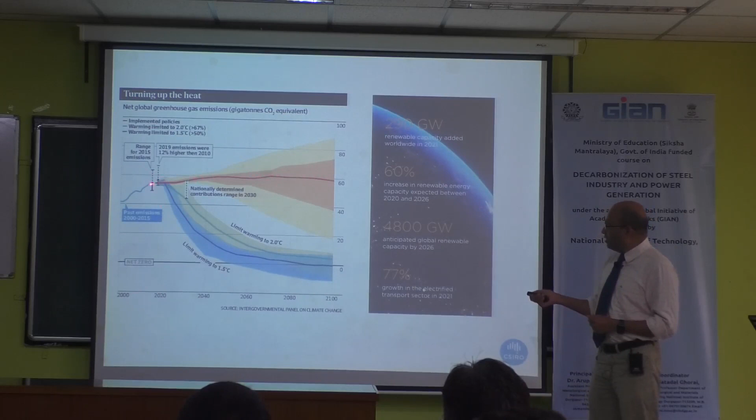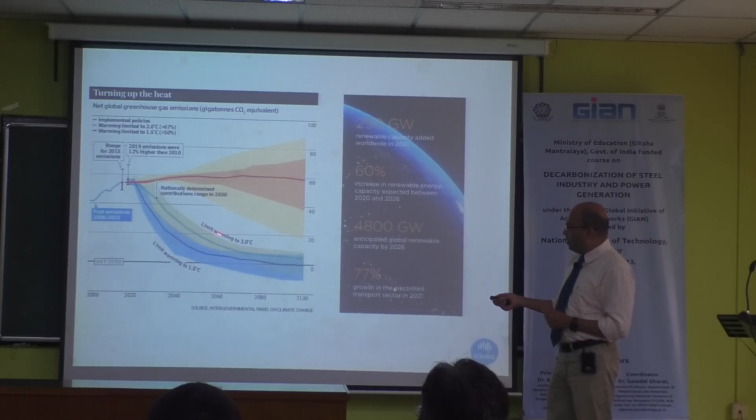If you implement policies and nationally determined contributions, every country has to produce this much, then you need to follow this kind of path to net zero. Some countries will hit net zero at 70, some at 80, some at 50, etc. But globally, if you follow that protocol and limit warming below 2 degrees, or below 1.5 degrees, substantial reduction is required. That's why huge renewable capacity is already being built - it's anticipated that by 2026, 4.8 terawatts of renewables will be in global capacity.

Even so, if you electrify everything, that's the hydrogen and decarbonization story. We know there aren't many options - one option is CCS, and one option is probably renewables and hydrogen.

If you look at CCS - can you go back? So you're saying that for limiting to 1.5 degrees centigrade, we have to make greenhouse emissions zero by 2100, something like that.

That's ambitious. Well, that's the thing - cost and climate change, which one do you want? Which one both? Or maybe even if you can limit somewhere, whatever trajectory you take, hopefully that will have a good outcome. But if you do nothing, it will go like that - this is not the option. At least the global consensus is that it's not the option.

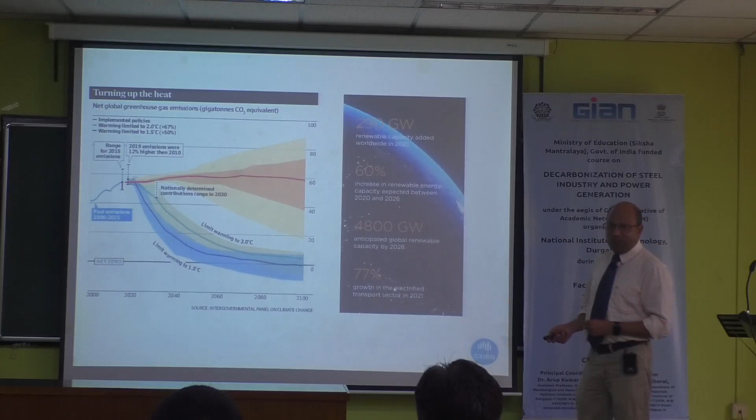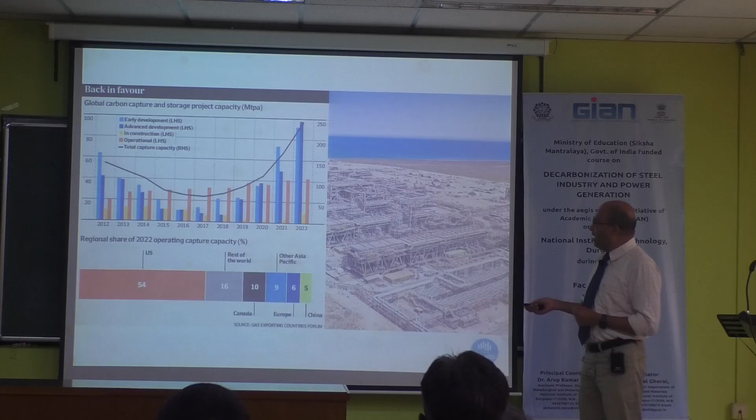Now let's move into the hydrogen story. We discussed this quite a bit, but let's go into the deeper end of it.

Primary resources, renewable energy - hydrogen is not an energy itself, it's an energy carrier. So we convert energy: you've got fossil energy, you've got other surplus energy, and then through electrolysis or other conversion processes, you can liquefy it and load it on a ship like LNG. So LNG, you can set up for liquid hydrogen gas maybe, something like that. Then in liquid form you can transport it by other means, and we'll look at some scenarios of what situation and what transport option should be used for hydrogen.

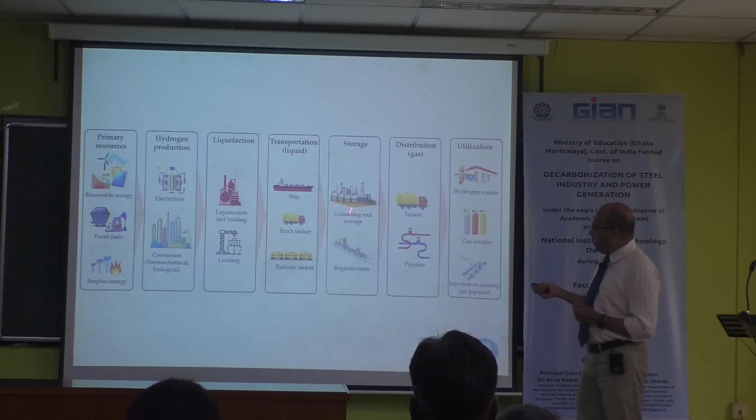Loading, unloading, and also regasification - you can put it in a tanker, pipeline, hydrogen station, refueling station, etc. That's the way, if you look at the broad structure.

Now at an even smaller scale, you can have an electric grid with supply, where solar can feed in, or wind, or other renewables - not only solar and wind. Then you can put in an electrolyzer, and the electrolyzer produces hydrogen and compresses it. You can transport it in a tube trailer, or then you can store it.

You can put it in a refilling station, and as I said, that's 8 kilogram hydrogen per 100 kilometre for a bus, for example, this kind of configuration. You can have this as another interesting system.

Some say it's costly, it's expensive. But what if we integrate with other industries? I don't know how they developed the sewerage system, the wastewater treatment system, not only for cities but also for industries. Wastewater treatment uses a lot of oxygen, so you can have oxygen generated, as I said, 8 times hydrogen. You can have your wastewater treatment plant, and then you can have it treated. If you combine 2-3 industries, this becomes a bit clumsy, but as long as you can supply the gas in the system, overall you're making more efficient, more beneficial utilization of the energy. So that can be another configuration.

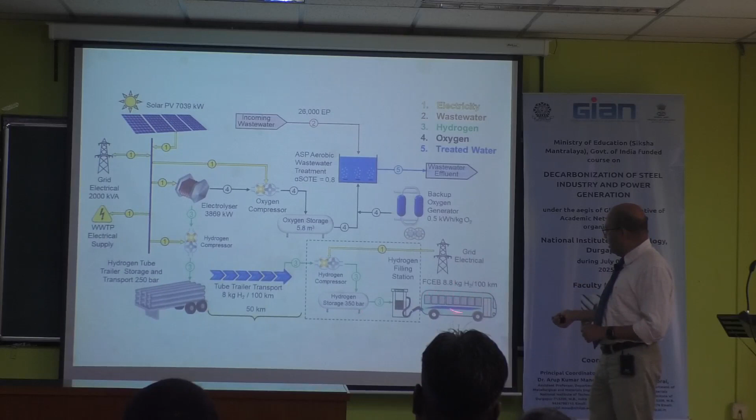Which one? Fuel cell electric vehicle. This one? Fuel cell electric bus. So, fuel cell electric bus. That's right. Basically, on the top there is maybe a 60 kilogram cylinder of hydrogen at 300 bar pressure, and here there is a fuel cell that supplies the fuel cell power, and then the bus.

The bus uses 8.8 kg hydrogen for 100 kilometers, something like that. But I think that has been more efficient - you get less hydrogen, 7 kilogram per plane, something like that. This is one of my papers, with one of my students, Dr. Arash Aghakhani, who did that one.

So that's high demand and long distance, and it is the longest distance, highest demand. We did some analysis, but that's behind the analysis - there are a lot of numbers, but broadly this is the scheme of the results.

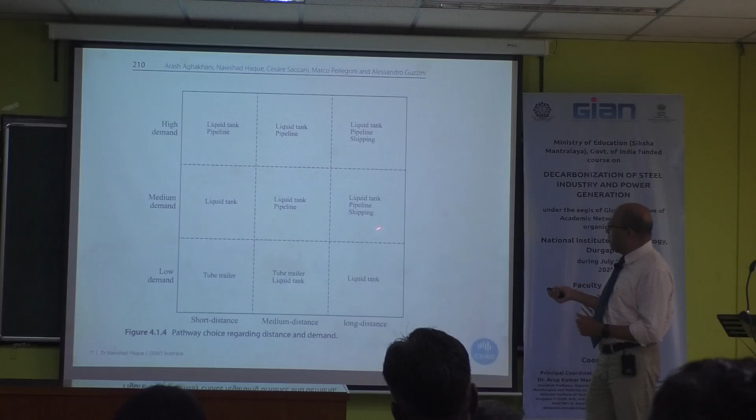If you see high demand and short distance, you should think about liquid tank, pipeline, tank, tube trailer. If, on the other hand, you have long distance but high demand, then pipeline, shipping, intercontinental transport - that sort of configuration you can have. So this is more on the transport evaluation of hydrogen.

As we said, you get electrolysis - that's what we're talking about. You can also gasify fossil energy like coal, particularly coal, and then steam - this is a common current method. You can say 70, 80, even 90% of hydrogen is probably made by that. Coal hydrogen is only Chinese, as far as I know, not others. Most places use steam methane reforming.

For example, fertilizer plants, urea plants, wherever hydrogen is needed, even oil refineries use substantial amounts of hydrogen, and that's mainly steam methane reforming. You produce hydrogen, put it in similar scenarios, store it, and then transport it and utilize it in various energy situations.

And apparently, if you have fossil hydrogen, you must capture the CO2, then it becomes blue hydrogen. If it is electrolysis green hydrogen, maybe there will be a mixture, but ultimately the CO2 footprint of this product should be low.

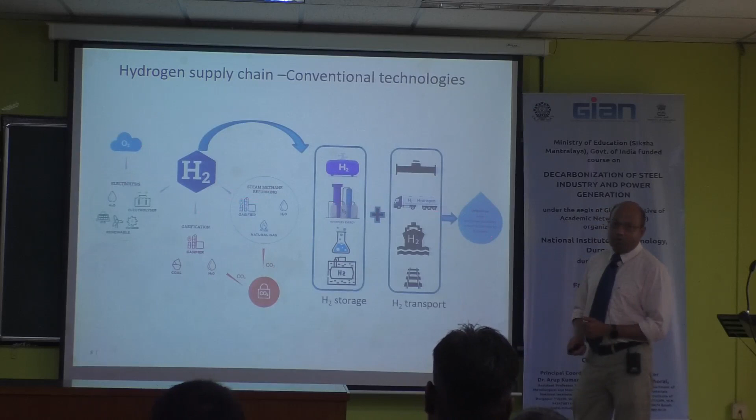Again, some new technologies - gasification, pyrolysis, even biochar, or fossil coal, carbon black. Because of methane pyrolysis, you can get carbon black also. That's another product - in Australia, one company called Hazer process basically produces solid carbon black, or carbon product, or even graphite. It's a very expensive material, as you know, graphite, because of the battery industry development and demand.

So these are the various ways people are thinking about it, because you want to reduce the cost of hydrogen. So what if you make hydrogen from natural gas, you can get some solid product, and that will reduce the cost. But at the end of the day, you can also capture some CO2, in the sense that the carbon is attached to the solid material. So all sorts of configurations are being looked at to reduce cost and reduce CO2 emission.

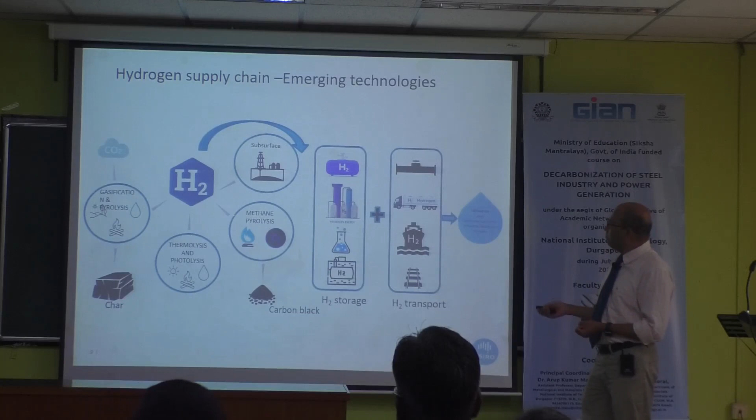If you look at the reforming process - steam reforming, partial oxidation, or autothermal reforming - your feedstock could be hydrocarbons, essentially fossil. Operating conditions are mostly high temperature. Many of these are commercial, used in various other technologies and industries. So it's not much new, really.

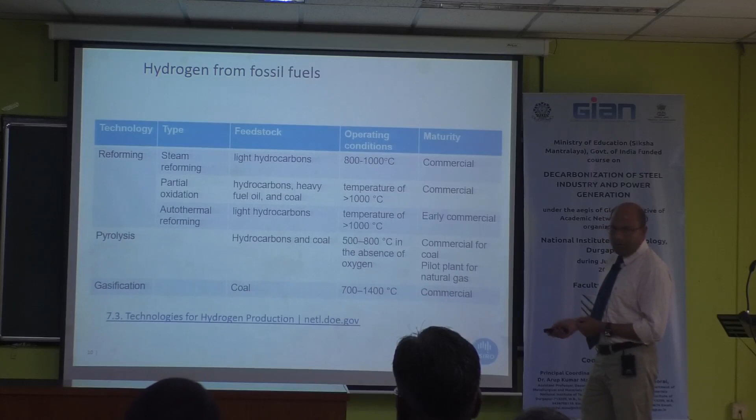But pyrolysis - sometimes some pilot plants are operating. Coal gasification is well established, commercial - there are hundreds of plants operating, particularly in China. You can also use biomass. Biomass is the same thing, but again, cost and biomass availability ultimately mean you need the feed material.

Biomass gasifier, still not a lot of these plants around. My major interest is green hydrogen, which is electrolysis - alkaline water electrolysis, PEM technology. So maybe we will spend some time on PEM technology today, and also SOE, solid oxide electrolyzer, and anion exchange membrane. Basically two inputs: water and electricity.

It's nothing else you really need. Most of this PEM technology is really room temperature kind of condition. At the end of the day, some of them - alkaline electrolyzer - there are large megawatt scale systems; Chinese are heavily promoting alkaline electrolyzer, I can see. PEM commercial, you can get some license through ITM.

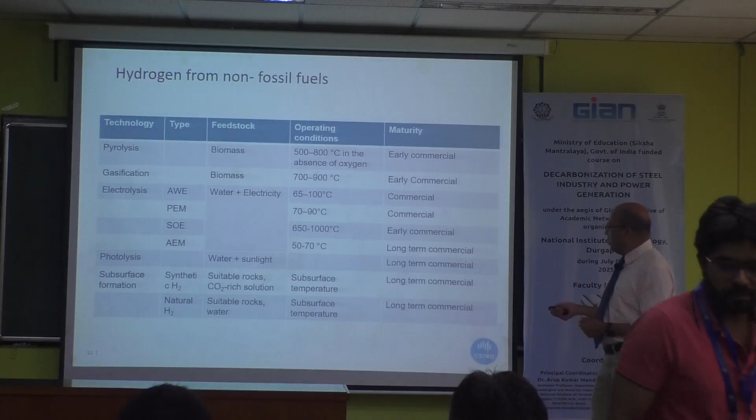Hydrogenics is a company that used to use PEM technology also. Siemens had got now maybe 10 megawatt, 50 megawatt - it was never heard of before, because probably it was below 1 megawatt scale. Now we are talking about 50 megawatt operational. Still, people are trying and learning. I wouldn't say that's fully commercial, but the other one is prototype.

For example, solar panels where at the same time you produce hydrogen - so you don't need another separate equipment. It's a kind of integrated system. Then there's natural hydrogen, which I will probably talk about.

PEM hydrogen, how does it work? How is it extracted? I will go into that in a couple of slides later - I'll go deeper into the proton exchange membrane technology.

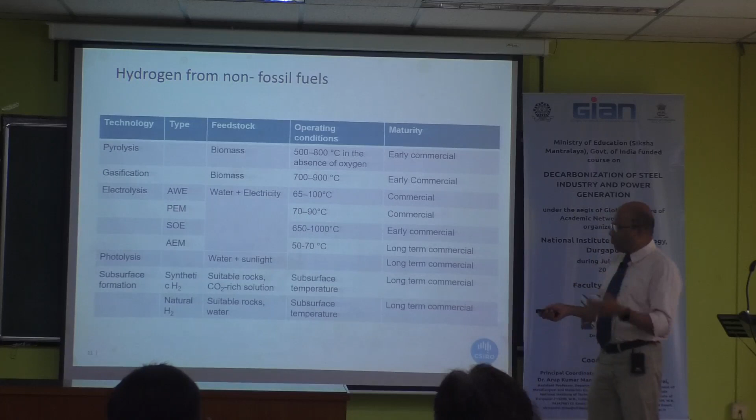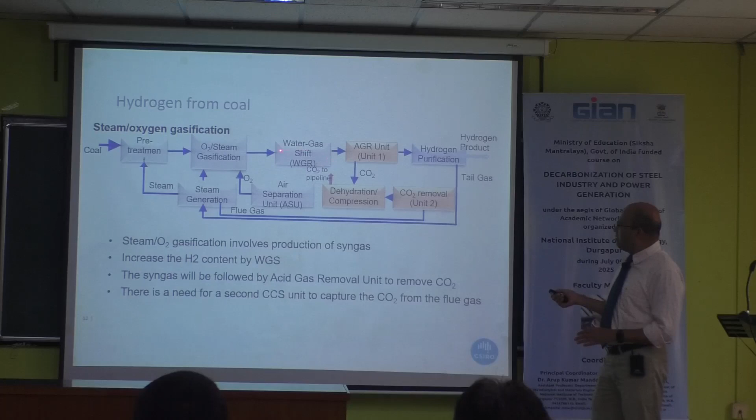And obviously CCS is required in some cases to make it completely free of CO2. What is water gas shift, WGS? That's kind of steam reaction - it makes CO2 plus hydrogen essentially. That's the classical reaction.

What is AGR? Acid gas removal - that's kind of gas treatment. You have to do some treatment for the gas.

Hydrogen from natural gas, which currently accounts for 50% of hydrogen production, is from natural gas via steam methane reforming, being the most prevalent production technology, with emission intensity depending on situation of 7.5 to 12 tons of CO2 per ton of hydrogen produced.

That 12 ton figure is generally the benchmark people look at, and anything you reduce against that is the target. I don't know if 7.5 is possible if you run that plant from renewable electricity potential. But natural gas is the major thing - most of the world's urea plants, like in Allahabad, fertilizer plants, ammonia plants, any methanol plant you go to, that's the common technology.

The emission intensity can be significantly reduced above 90% through integration with CCS, depending on technologies. But CCS also has a lot of challenges. Due to large reserves of fossil fuels in some countries and well established technologies, some countries are favoring hydrocarbons, so you need to have CCS to reduce what we call blue hydrogen.

What is CCS? Carbon capture and storage - we discussed that some parts of the world are implementing this technology, where you capture CO2, enrich it, and store it somewhere underground. Now utilization is slowly coming into play, so you can utilize parts of that too.

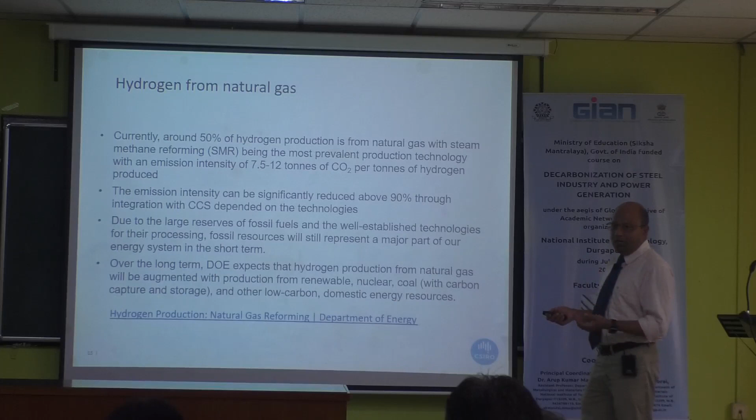I'll go into a little bit more detail on that, steam methane reforming. So it's natural gas and steam fed together, split feed for reforming, and then generally there are 2-3 reformers - primary and secondary reformer. Then again water gas shift reaction, acid gas removal unit, and you purify the gas to get pure hydrogen essentially. So the process for syngas production starts with pre-reforming and reforming.

The autothermal reforming is also a process in which the reforming thermal energy is produced from burning natural gas.

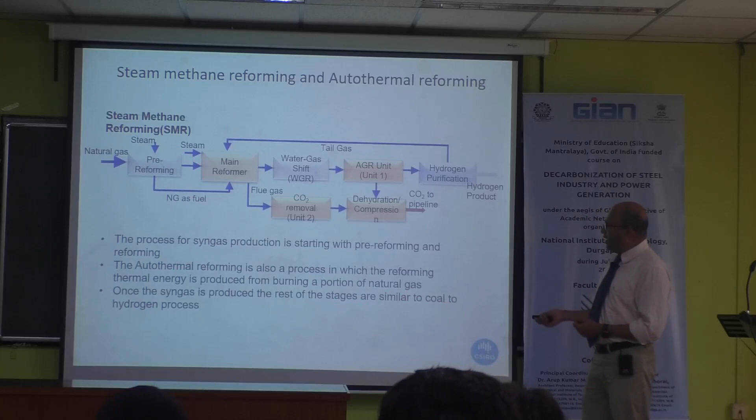This is a kind of new, interesting process some countries are working on. Actually, Australian companies are raising funds to build bigger plants using natural gas, which you pyrolyze and purify to get hydrogen gas. Obviously there is no CO2, but some carbon can be made into a carbon product like hard carbon or graphite. I think this company is trying to produce graphite because there is huge demand for it in the world.

So methane pyrolysis is a process in which thermal energy is applied to methane gas to break it, because methane has got 4 units or molecules of hydrogen. Breaking the chemical bond between carbon and hydrogen requires a lot of heat, generating hydrogen gas and a solid carbon product with no CO2 emission.

So there is a unique advantage of methane pyrolysis over conventional steam reforming and coal gasification. Depending on the characteristics and price of the carbon product, its sale may improve the economics of the industrial methane pyrolysis process. If you have pure graphite or some premium carbon product, it can attract a lot of revenue, which can subsequently reduce the hydrogen cost - so it's a kind of multi-product process.

If we talk about biomass, ultimately biomass is carbon and hydrogen - we call it carbohydrate. Biomass pyrolysis involves rapid heating of biomass, often lignocellulosic-based particles, absent of air, at approximately 500 to 700 degrees Celsius. There are various ways - low temperature and high temperature pyrolysis. This results in the production of gas, vapors including water, and solids including mineral matter and char, similar to the charcoal production scenario I showed you.

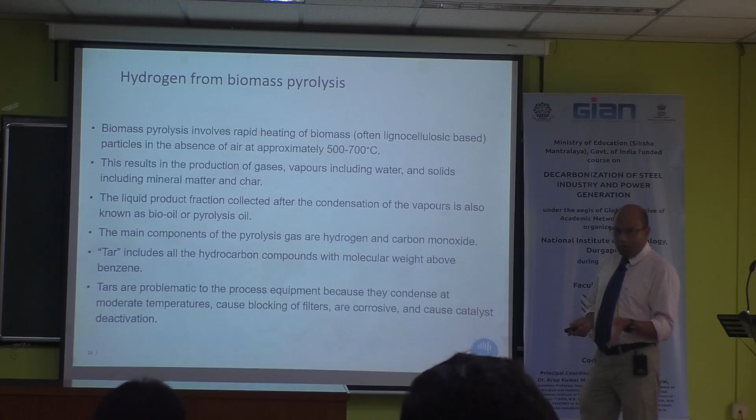But again, it's about the treatment of biomass - that's another story, and how much biomass you have around, how much you can produce, depends on the country, the land, etc. In Australia, we have a lot of waste biomass - I think many countries have that. But because we have a strong wood and forest-based industry, they produce a lot of waste that could potentially be utilized. So that's biomass pyrolysis, but biomass can also be gasified at high temperature.

The good thing is that gasification can take quite a variety of biomass. You get syngas, and there are a number of ways to use it - this syngas is quite a flexible chemical precursor. From biomass gasification you can produce methanol, ethanol, diesel, even Fischer-Tropsch liquids, which can move into diesel fuel or even aviation fuel for planes. You can also produce ammonia, synthetic natural gas, etc.

There are some advanced-scale projects in terms of TRL in North America, and particularly in Europe. But despite the development of the concept, it hasn't been commercialized for hydrogen production, because the hydrogen amount is limited, and if you want to apply hydrogen in a fuel cell, there's a standard now requiring it to be very, very pure. This process may not be able to produce that kind of fuel-cell-grade hydrogen, but it may be possible for blending into the natural gas pipeline.

So it depends on where you want to use it. Sir, if you would compare biomass with your municipal solid waste, you have hydrogen versus carbon ratio, and based on which you assess whether this project is feasible or not.

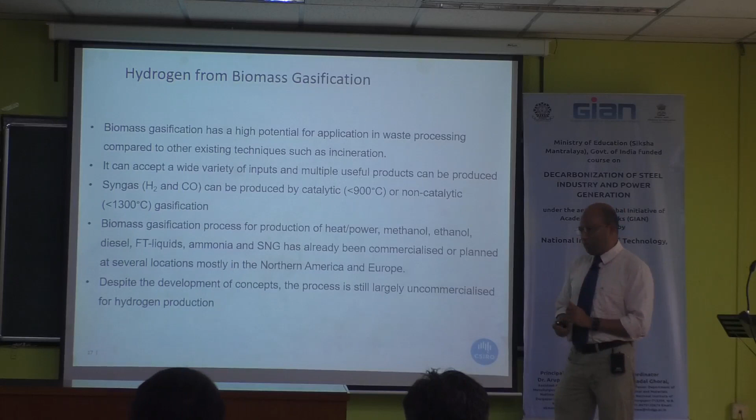So I think there are, as I said, that air, steam, oxygen mixture that sort of presents when you use biomass to hydrogen product. But essentially the technology is very similar, though some people tweak it with several other catalysts or mix. Ultimately, that's the same technology.

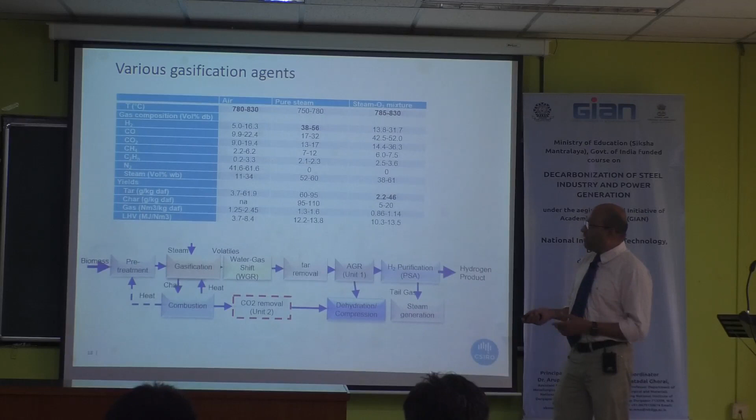So this is kind of my favorite area, and I think this is the area it should be, because ultimately we are doing so many things and it's hard to build the thermodynamic side. So you put lots of energy and do lots of things, and finally you get a product, and what's the cost, what's so much activity.

With this one, I think it's neat in a sense because if you can get enough electricity, that's the key point. If you get enough electricity and that comes from renewables, then it doesn't matter how much you use. So generally in 2020 and 2050 targets, you can say three electrolyzers we're talking about here.

Does that answer the question kind of? We'll go into more detail of each of the individual technologies. I can show you the cell level, stack level, and the system level probably in one of the slides. Can you explain the difference between all three technologies?

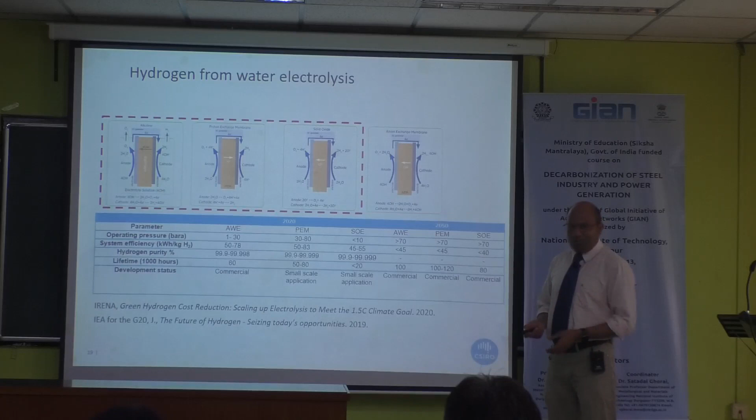I'm not sure if any Indian company is producing electrolyzers - anyone have around? No, not yet. So because of that, if they see a business opportunity, you will see everyone get into it, like mini cars and so on. But I heard that Reliance is thinking of potentially producing electrolyzers. I'm sure battery companies are considering it too - it's a new product, so obviously people will be coming in slowly. So that's it, a little bit about alkaline.

So both need deionized water. This has got, as I said, potassium hydroxide, so you get water, the alkali kind of moves around, and then you get hydrogen separation. You can have oxygen as a byproduct, and you gas cool them and you get hydrogen.

With PEM, you get deionized water, which goes to the water storage, and that's a PEM stack. You pass water through small channels, and then you apply electricity, which breaks it into hydrogen and oxygen. The hydrogen goes through the membrane to separate out. It's a very simple process in this sense.

You get heat, and because some water will be taken with it, you need to add that back to the water, and then you get pure hydrogen. This sort of system is very responsive to renewable intermittency and also produces very high quality hydrogen, even at pressure.

Ultimately, electricity will be fed to both places, and they are very similar in terms of electronics. Cost-wise very similar, but here because you are handling a lot of alkali, there's a corrosion issue, and here not such thing.

Oxygen purity, that's a good question. It's not sufficient for medical oxygen, maybe for industrial application. For medical oxygen, we need to develop and produce another step to get it. Maybe you can make some tricks here - that's what we have done, our IP, so it can generate hydrogen but also medical grade oxygen.

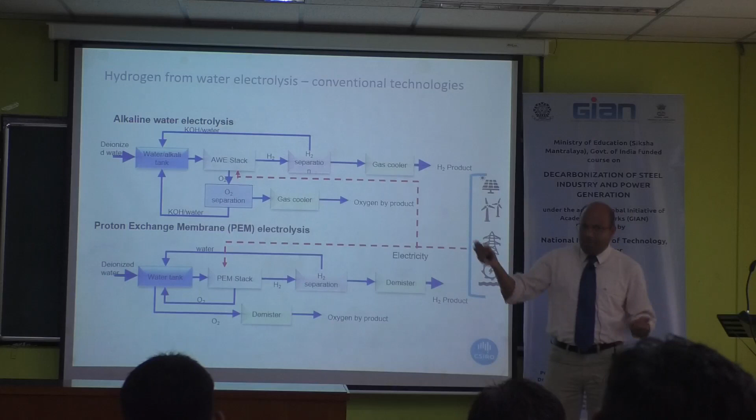For transportation, what kind of pressure is required to move hydrogen? What pressure is required to transport it? At least I would say 200 bar, or liquefied which is even lower, or in a gaseous form. Even say 700 to 800 bar pressure in the car, because the car has to be at that pressure. When you inject it in, it will reduce a bit of pressure. At 700 bar it's still gas, very compressed gas. If you go a little bit up, maybe it will be liquefied - so near liquefied, but not liquid yet.

The solid oxide electrolyzer operates at high temperature, but we need that heat somehow. It enables favorable kinetics that allow use of relatively cheap electrodes - that's another advantage. We'll go into the materials area a little later. Electricity demand decreases and part of the energy for separation is provided through heat, with potential for reversible operation.

This can be run as SOE, solid oxide electrolyzer, or as SOFC, solid oxide fuel cell. If you reverse it, it can give you power - the same unit, depending on how you operate it, can give you hydrogen, or if you pass hydrogen through it, it can give you power. How is it formulated? The catalyst changes at the anode and cathode, so if you change that, the same reaction happens. Solid oxide electrolyzer produces hydrogen, while the solid oxide fuel cell produces power - that's the difference.

And then this one I'm not too much familiar with, to be honest. That's what I call anion exchange membrane. Some countries, some companies I heard recently, are very active in this area. Apparently there are some advantages, but I'm not too familiar with that one.

In Australia there's another company called Hysata. They said they've made a big breakthrough, 95% efficient compared to any of these technologies. The government is supporting that one. But our understanding is it's still kind of fancy, small scale works probably, but what will happen at larger scale is yet to be seen.

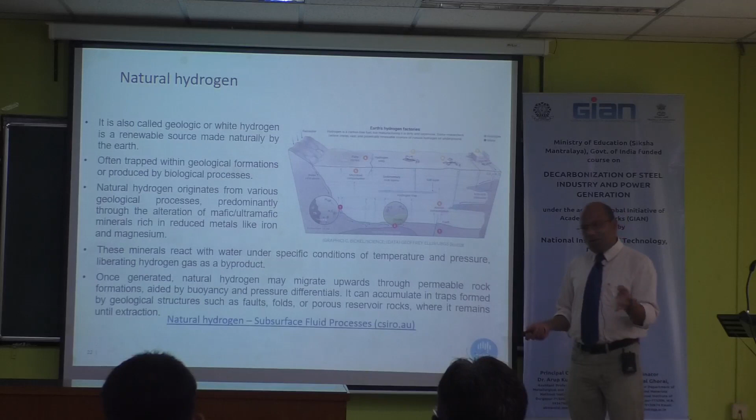So let's move into natural hydrogen, called geologic hydrogen - it's like a gas field. In some places underground, a very low amount of hydrogen is present along with gas. My team and I have looked at this with some geologist colleagues; a lot of people are working on this, it's a very hot area. Many oil and gas companies are interested because if hydrogen comes in, they can leverage what they've already explored.

So the scenario is: you have oil there, you take it and process it, running the process plant maybe with renewables or something. That gives you relatively low CO2 hydrogen at relatively low cost, but obviously you need to purify and process it.

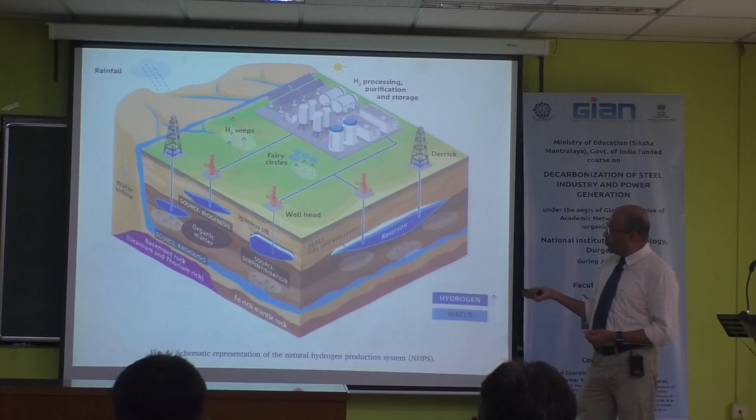There are a couple of projects I know in Australia, at least two companies. One is called Gold Hydrogen - natural hydrogen is called gold hydrogen, that's another color. They've raised some money and are quite serious, based in South Australia. We did a techno-economic analysis for them, and one of my team members, Dr. Mohammed, and other colleagues developed a model for that hydrogen process - something going in, out, and ultimately getting compressed gas.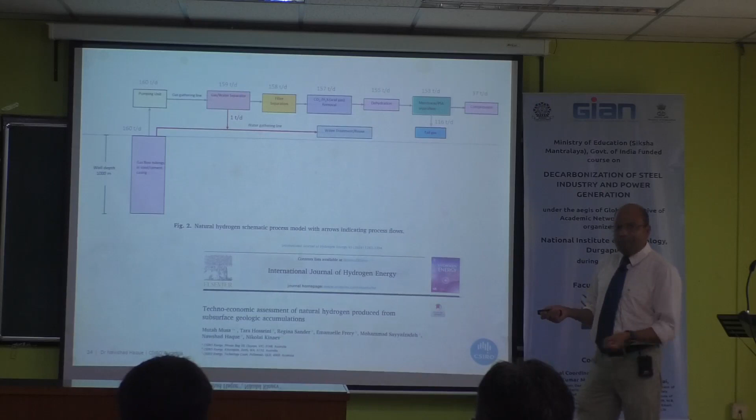Most of these hydrogen gas fields have helium too, so you can have a byproduct. There's good demand for helium in the world - so which country has got it?

According to our assessment, production cost is about $2.97 per kilogram - that was the base case scenario. But it depends on the hydrogen concentration: if concentration is high, it can be very cheap; if low, it can be quite expensive. Same with flow rate, because in gas flow you cannot control it - high flow rate, low flow rate means high capex or low capex, since it's a natural material you cannot control. Discount rate and tax rate can also vary, giving a sensitivity scenario for the levelized cost of hydrogen.

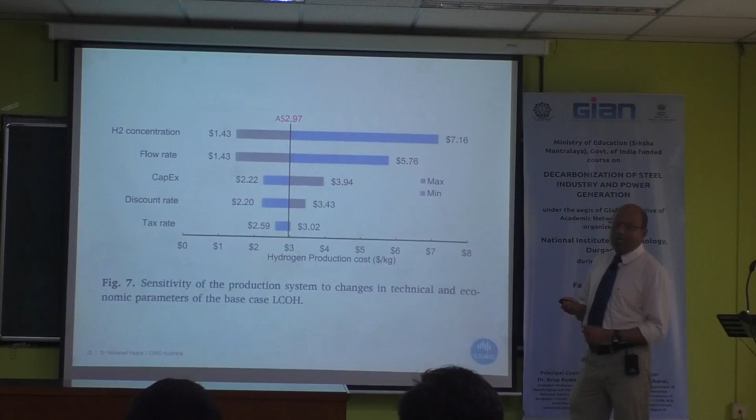That's natural material, and the good thing is this is probably the first reported techno-economic study on this kind of hydrogen in the whole world. Similarly, we did LCOH for gold hydrogen - I don't think anybody else has looked at that.

Now with PEM - that's our PEM technology. We worked nearly 2 years on hydrogen, plus about 20 years of work toward developing the PEM electrolyzer technology. That PEM electrolyzer was given to a company called Endua, and Endua now has a kind of box, this kind of system - they call it the Endua power bank. It's a long duration energy storage product, self-contained, easily deployable, relocatable, on-site hydrogen generation and storage.

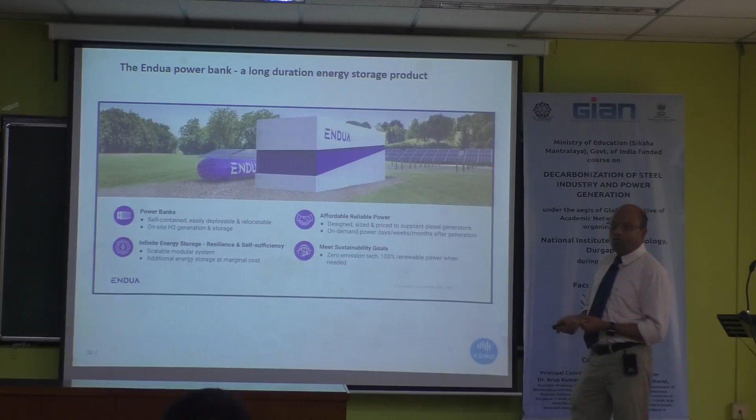It offers infinite energy storage because you have a 24/7 situation, and it's scalable and modular, providing additional energy storage at marginal cost. Relatively cheap, they think, but you have to contract them because they're not selling the product directly. The IP is essentially ours, and we give them R&D support. It's a zero emission technology, 100% renewable power when you get it - so if you have renewable power, those people are considering it seriously. I'd recommend communicating with this company; there's a website I can point you to later.

Our technology - we have a good chapter on these kinds of technologies. At the system level, if you go from high level, as we already talked about, you have the electrolyzer, water, oxygen coming up, hydrogen, and then you compress it and it goes to storage.

At the stack level, you have one cell, another cell - it's like a battery. Those are the materials: they call it the porous transport layer, PTL. Then there's the coated material bipolar plate, and iridium as the anode material, platinum as the cathode material - sometimes platinum palladium can also be used. So that's the cathode, anode, membrane, porous transport layer, and the bipolar plate.

That's kind of a cell, that's one cell. You have another cell, depending on modular design. This may be the smallest unit. If you have 10 megawatts, you may have maybe hundreds of cells together.

Maybe a few cells make a stack, 10 cells make a stack, then maybe 10 stacks make a kind of system. And that system is not the only thing - you also need balance of plant, water purification system, water pumping, hydrogen separation, hydrogen storage, compression.

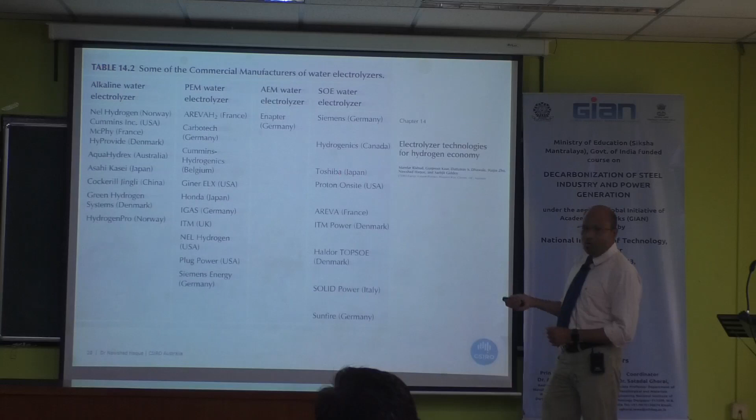Japanese, Koreans also - Koreans. I wish some of the Indian companies will be coming into the play - Reliance Power, maybe, as you said, or others may have a product here.

Make in India programs - the challenge is not capital, it's materials, which are raw material related. So that's a more detailed electrolyzer comparison - what's the electrolyte material, what's the separator - that's what we need to spec.

For example, if you go to solid oxide electrolyzer, it's YSZ, Yttria stabilized zirconia. Zirconia is very difficult to get, a very expensive product. India has a lot of mineral sands, and potentially zircon can be sourced. Yttria is a rare earth special product - not rare earth exactly, but a critical mineral. That's why yesterday I mentioned about it.

The challenge is, some people say cost - I don't think cost is the real challenge, it will come down because a lot of people are working on it. The challenge is the amount of material required for this specialty material. For example, lanthanum, strontium, cobalt - and LSM, lanthanum strontium manganite or some similar metal product. These are the special kind of materials needed, along with YSZ. So with the solid oxide electrolyzer, the problem is the material, and same with PEM.

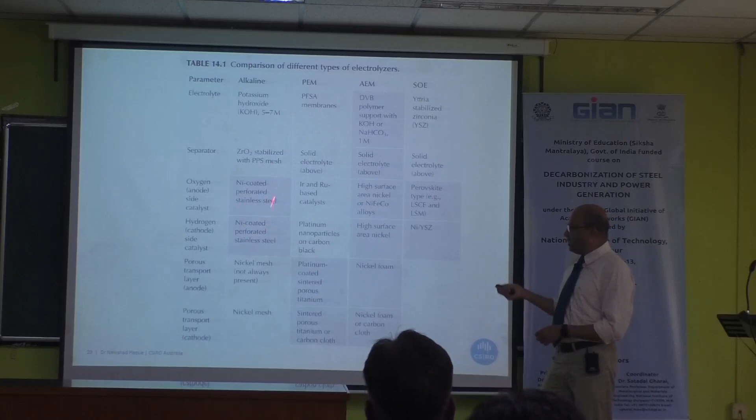But here there's a lot of KOH - we didn't even cover KOH. That's another thing, and also the operation - each technology has its own pros and cons. I believe one of these technologies will win, I don't know which will really be the winner. We are betting on PEM and also SOE, but maybe other technology will come. Time will tell.

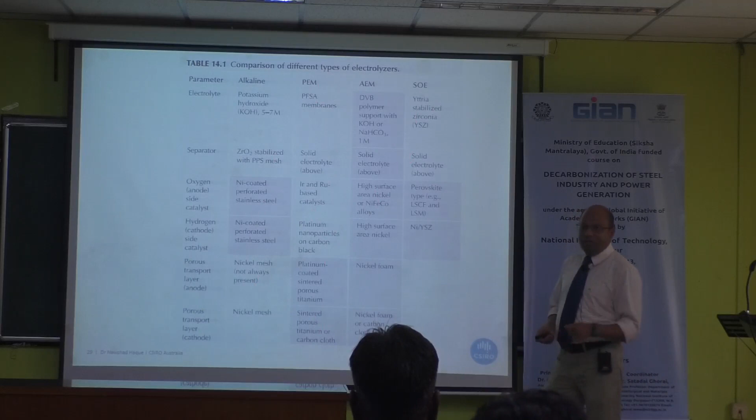Again, the bipolar plate and the frames each use their own materials. Generally, if you talk about the balance of plant, it's mainly titanium, stainless steel - even non-steel is used overall - and nickel coated stainless steel, things like that.

As this technology takes off, it will require a lot of material. One of our students, a postdoc, Dr. Shalini Dharma from NIT Allahabad - I gave her a project where we're looking at, for India's whole unit capacity, how much steel, aluminum, and other materials are required. It's enormous - a huge amount of material required.

So can we divert from currently producing 100 million tons of steel toward renewable energy transition, or targeting say 300 million tons by 2030? How much of that material can you allocate for energy transition? That's another question, and we've already published on this - you can Google how much steel, aluminum, and copper type material is required for India's transition and for realizing wind energy. We're also now looking at how much rare earth is required and where that will come from - that's another question to answer.

So again, there's a table from our chapter showing 2020 and 2050 targets - I showed you the DOE target before - for alkaline electrolyzer, PEM electrolyzer, AEM (anion exchange membrane), and SOE electrolyzer. You can see operating temperature, operating pressure, current density, voltage efficiency, specific electrical energy requirements, and system efficiency.

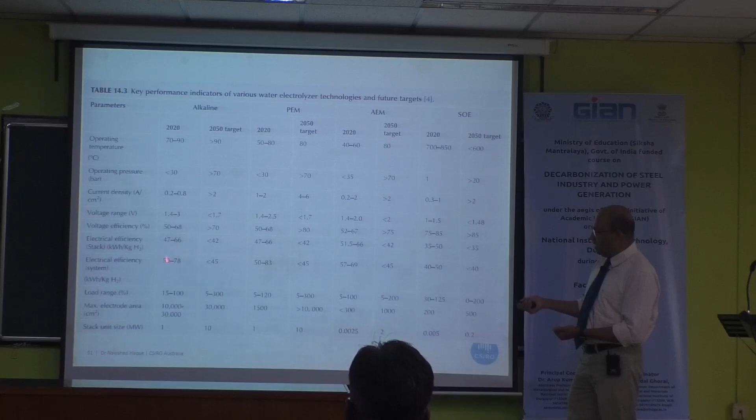Electrical efficiency at stack level and system level - you can see that when you go from stack to system, you need more electricity. Then load range, maximum electrode area, stack and unit size - you can see SOE is still small scale, whereas PEM systems are maybe at 10 megawatts already.

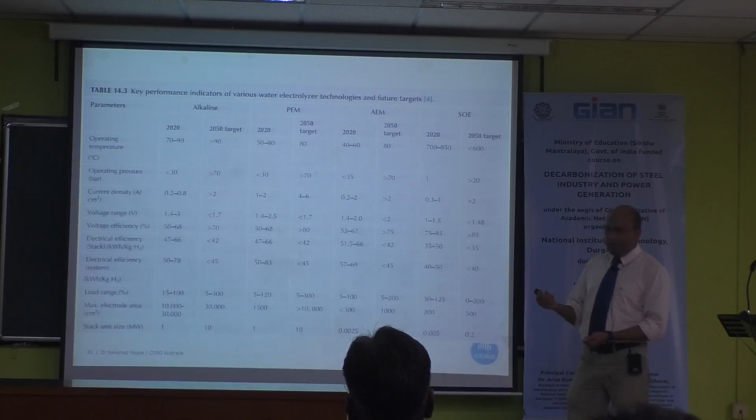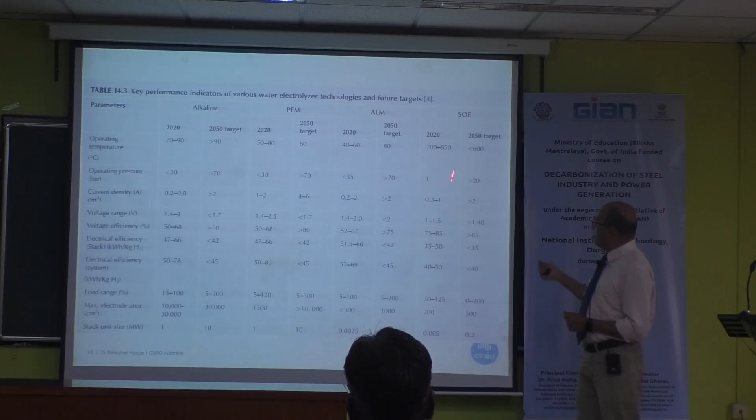Each technology has many people working on various approaches - different countries have their different focus, and the Chinese are focusing on alkaline, though they also do PEM, not exclusively one or the other. I think we believe PEM and SOE will be the key technologies.

And also hydrogen purity, how fast it can respond. As you can see, PEM is less than 5 minutes, whereas others are higher compared to PEM.

Stack capital cost - somebody asked about the capital cost, so that looks like it's a little bit less than target. If now they're saying 400, I doubt that is probably most cases, as you said, it's a bit more. But I think that's the highest cost, and also lifetime - it looks like they have run, although the target is 10 years, but they are less.

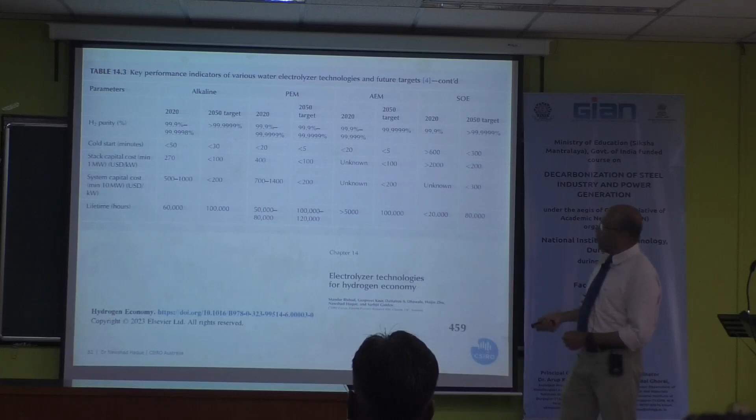So at the moment, maybe 6-7 years, that needs to be extended to 10, 12 plus maybe. SOE looks like, at the moment, less than 20, whereas that needs to be... any question about this, any technologies or confusion or anything like that?

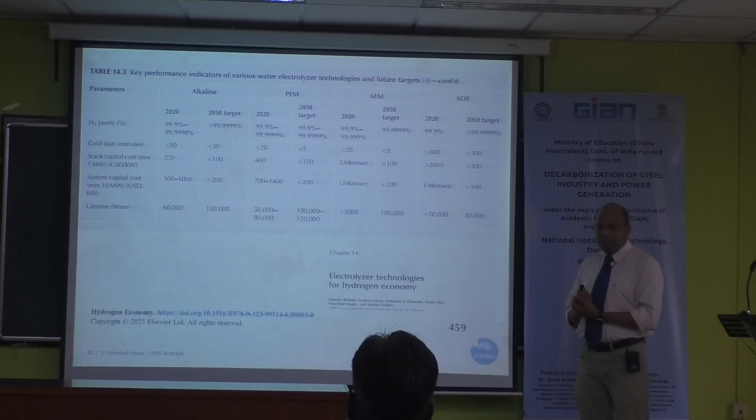Is it very clear? Okay. Just a question - if we start using hydrogen initially, like we have no use right now as of now, so if we start using hydrogen, what kind of technology initially at a very low cost can be utilized in a steel plant?

I think you should look at SOE. No, it's all right. Whatever technology may be for extracting hydrogen, but what kind of technology, in what...

Talking about hydrogen production? No, hydrogen use - use of hydrogen in the steel plant, what technology in hydrogen is there? That's matrix type, DRI type. Let me moderate - that is hydrogen use at scale.

Initially, stack injection of hydrogen gas. No, no - so what's the question? Can I explain? Can I answer? Please, go ahead, you got it. In steel plants, we all have electrolyzers, we all have hydrogen.

But coating of zinc, coating of aluminum, coating of magnesium on steel, tin plates - all steel manufacturing units having color coating lines or this kind of coatings, we have hydrogen. We have hydrogen plants installed. In JSW Engineers, we already have 2 hydrogen plants.

So what does Tata Steel use hydrogen for? What is the use of hydrogen? What do you do with it? Because we wanted to prevent the oxidation of the steel surface.

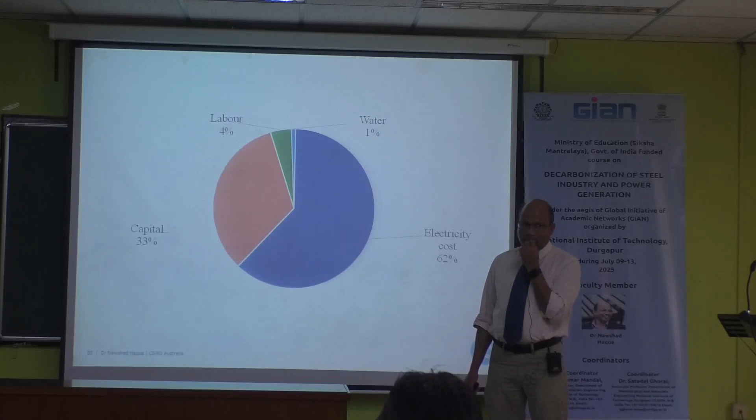So if you use argon - presently it's not there, it will come in the next plant. If you are using argon or any other inert gas, it's not going to be agreeable.

For example, you are making auto grade steel - automotive steel, that specialized steel. No, no.

In case of structurals and flat products, it's not required. In specialized products, we don't have that technology.

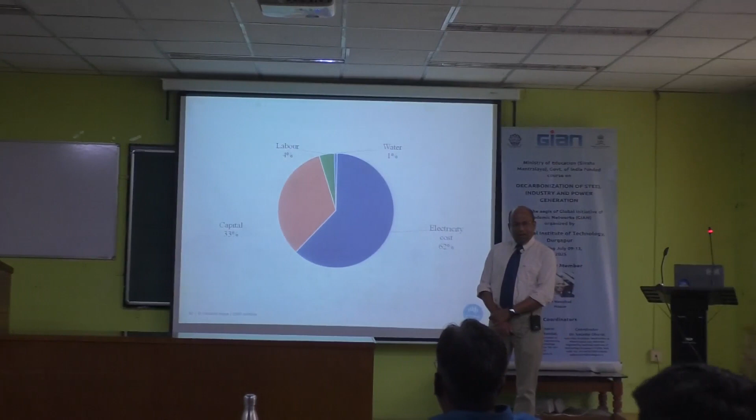Okay, at the moment in the steel plant, do you use hydrogen at all? No. Actually, no - the thing is that no. What he is saying is that it's plant specific. The answer is that it's plant specific.

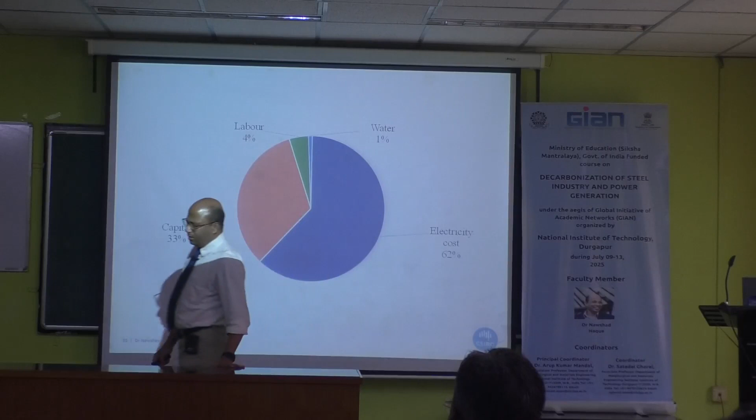We don't have the product of color coating. The thing is that we are talking about Durgapur steel plant - Durgapur steel plant and IISCO would not have that product. So that's why there is presently no use of hydrogen right now.

What about cooling? Some part of the cooling uses power plant hydrogen? Power plants use hydrogen - no, the blast furnaces in the steel sector are mostly nitrogen, water cooled. So you don't have hydrogen on site at the moment at all, huh?

Whereas power plants have hydrogen for cooling, right? Yeah, but we procure it from outside, from cylinders. So it's not much use - it's a small amount, very small, but it's still used. So that's in a closed loop.

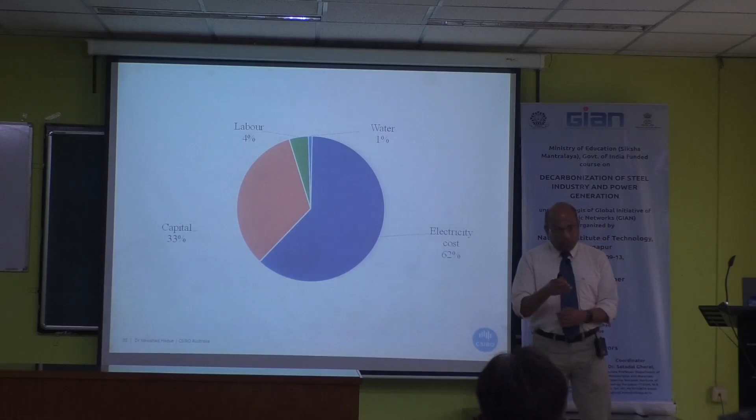So are you producing it? Use it in the steel plant or power plant? Power plant - so that's right, you are producing hydrogen. So on site you are producing it instead of using the cylinder - you don't take cylinders, you produce it yourself, at a small scale. What kind of technology do you use?

None of these would be in a blast furnace. A lot of them use water and air, then separate. It's a kind of oxygen plant, also uses hydrogen, can produce hydrogen. But anyway, there is an oxygen plant in the steel plant, right? What's the use for oxygen for all these BOS and other units?

Oxygen is mostly two uses: one is injection in blast furnace, and second is steel making. So if you have an electrolyzer plant, I think your objective is to get more oxygen rather than hydrogen, isn't it, at the moment? Because our oxygen requirement is very high. We have a 1500 ton per day plant.

So my feeling is that companies like you need to think about pilot plants, small ones, and try to learn, produce hydrogen and oxygen, and see what the option is.

So first, we need to identify the use of hydrogen. Then we need to identify where the production is, the area of usage of hydrogen. First, productive use - what is the use?

What's going on is, suppose you have a ladle repair area. Hydrogen instead of natural gas or LPG or whatever mixed gas is available for heating. Suppose you are using mixed gas in the plant - those mixed gases in blast furnace are in excess, we are flaring it out.

So why would someone invest in hydrogen then? So you have excess fuel with the plant. Yes, we are flaring it out. We are using it to our maximum capacity, then we are flaring out the rest.

So you don't need fuel, you need decarbonization. Yes, our target is decarbonization. So the objective - how you can manage that is a different proposition, isn't it?

So let me tell you the other applications - like reheating furnace with the HSM or any other sinter plant, pellet plant, regulating machines. They are going for oxy-hydrogen burners.

Oxy-fuel - it will include hydrogen use in that then, oxy-fuel. So many applications are coming. It sounds like in blast furnace they are using it.

It's coming, it's okay, but our question is that at the current plant, what is the hydrogen use? Whatever DRI you can do, but we don't have DRI. We don't have a DRI unit at SAIL right now.

But other steel makers seem to be establishing it in the next 5-10 years, new commissioning processes. Immediately there's no use.

But there are some DRI units already working, independent DRI units on a smaller scale. Another thing you can look at that way, is if you produce some hydrogen, what about the natural gas pipeline?

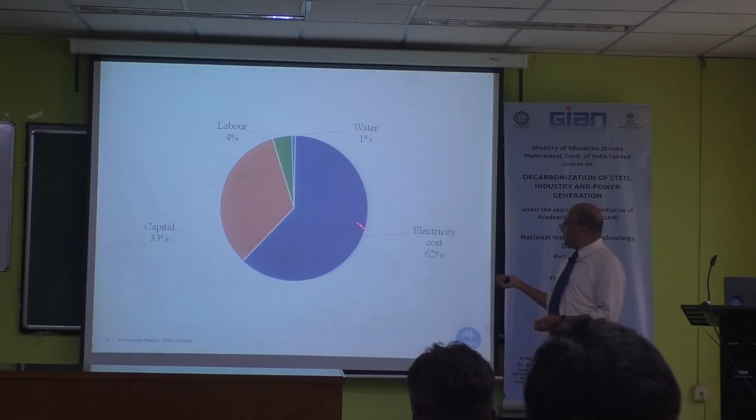So anyway, that PEM technology we evaluated looks like this: electricity is 62%, capital cost is 33%. Capital cost is a one-time cost, while electricity, labor and water are running costs.

Capital is here, but say you get a loan - so it's an interest cost, interest on capital, essentially that is for the electrolyzer. It's a requirement for the plant, for the plant as a whole.

If you borrow 100% of the money, that's it - whether you run it or not, you have to pay the interest, isn't it? So that's the money, but sometimes you have your own money.

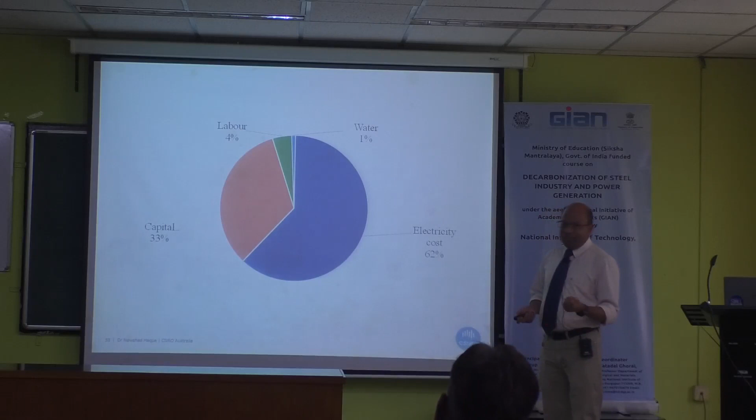And whatever the plan, so roughly it looks like two-thirds is the electricity. At least if you ignore capital cost, mostly the result is electricity.

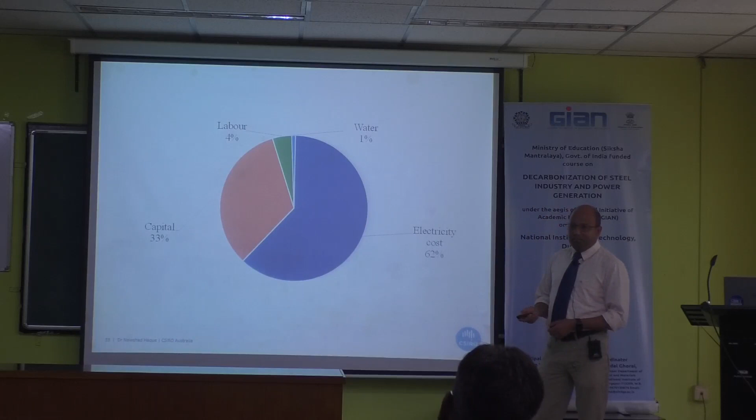So I think that fossil fuel based hydrogen production technology will have a significant role in the energy transition period, and that's what we see, maybe blue hydrogen. So gray to blue to green, that's the conversion we are thinking.

There are lots of potential for cost reduction of natural gas pyrolysis as the technology develops, through the opportunities for refining carbon as byproducts. A lot of people are seriously thinking about this because of graphite production. Suddenly there is not much graphite around the world, and prices are going through the roof. That's really because the EV market is taking off, and that requires graphite for batteries, and there is not much, so many companies are investing in that area.

And then biomass-based technology also remains a priority where biomass resources are available, and this technology could benefit from carbon capture and storage to become a carbon neutral process.

Natural hydrogen is also another emerging technology that has significant potential, and new exploration in various parts of the world is underway. Whether India has got natural hydrogen, we don't know, right? We have got gas, right? Gas field, offshore gas maybe. So if the offshore gas is there, which is CH4, potentially there is somewhere H2. So if that is the case, then people will be extracting H2 rather than CH4.

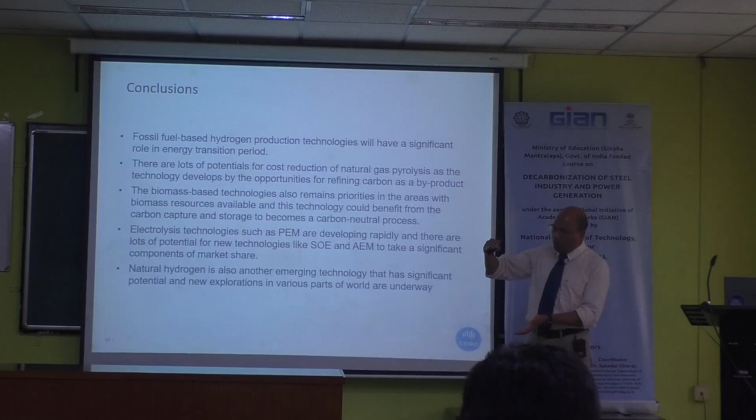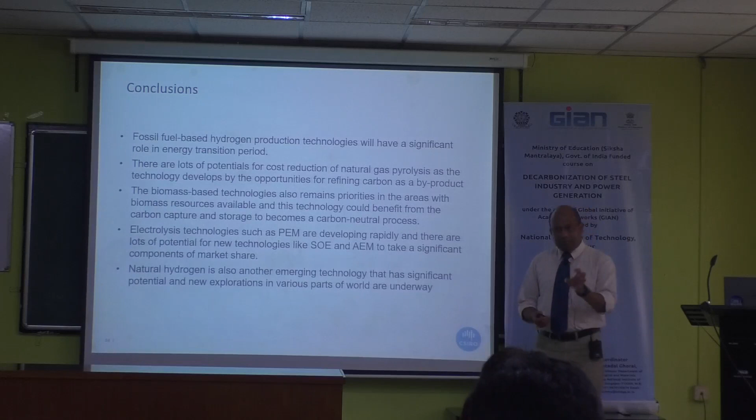This can also happen in a power plant where CO2 emission is there. You can capture the power plant gas, the CO2, but there is no hydrogen there. So you are talking about power plant gas and carbon capture. You can capture carbon, CO2, then enrich and store it, but you want to utilize it. Is it just making graphite? This is natural gas to graphite, but I'm not sure about CO2 to solid carbon making, that takes a lot of energy, and I'm not sure about that process here.